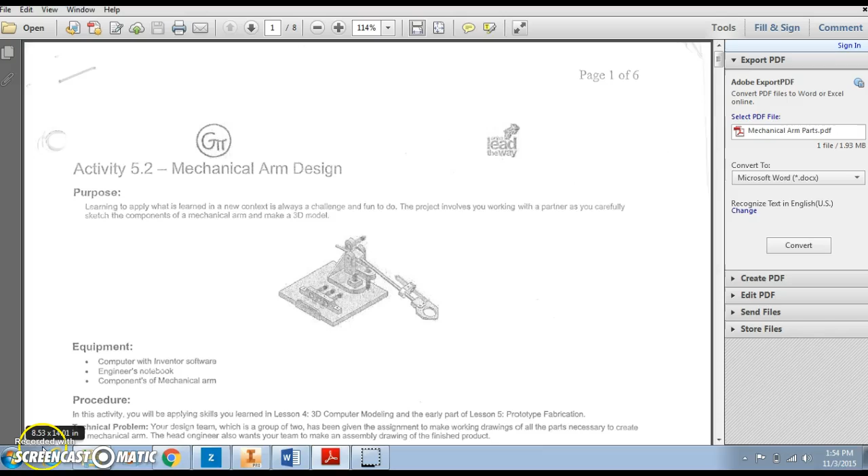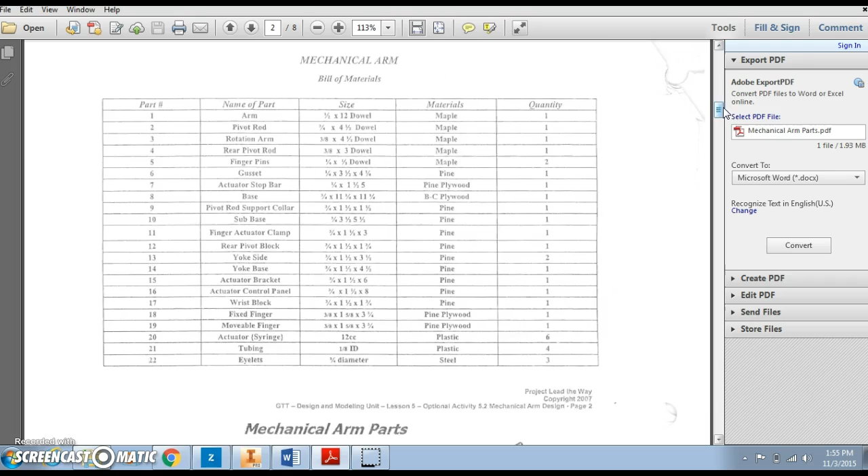Looking at my parts list, part 11 is a finger actuator clamp. Alright, scrolling down here.

There's part 11. I'm going to start with a rectangle that's 3 wide, 1.5 high, extruded 3/4. So 3 by 1.5. I'm going to create a new standard.ipt.

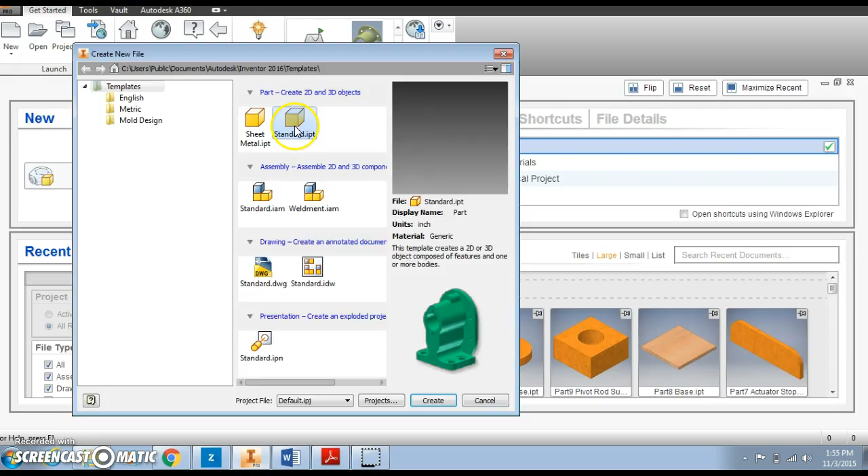And draw my rectangle, and make it 3 by 1.5. And finish the sketch.

Extrude it to 0.75. Alright, and there's my rectangle.

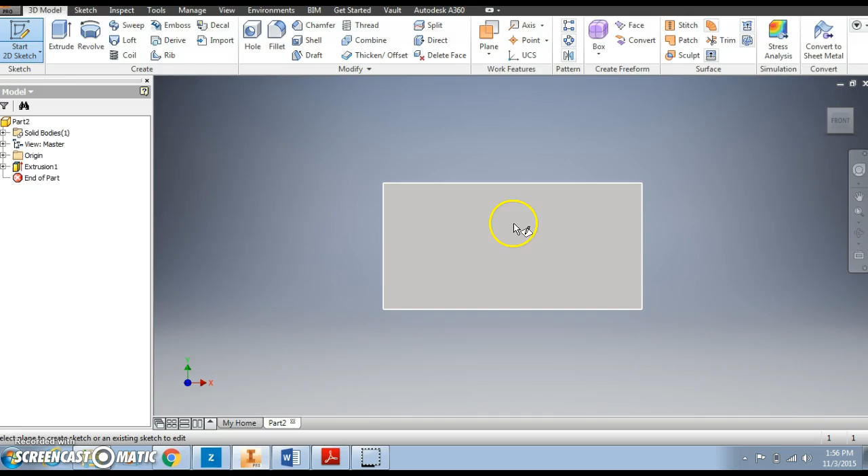Now I'm going to draw 2 holes on the front here. So I'm going to put a 2D sketch plane on here, project the geometry, and draw 2 circles.

Notice that the diameter is different. The one to the right is 0.5, the one to the left is 0.75.

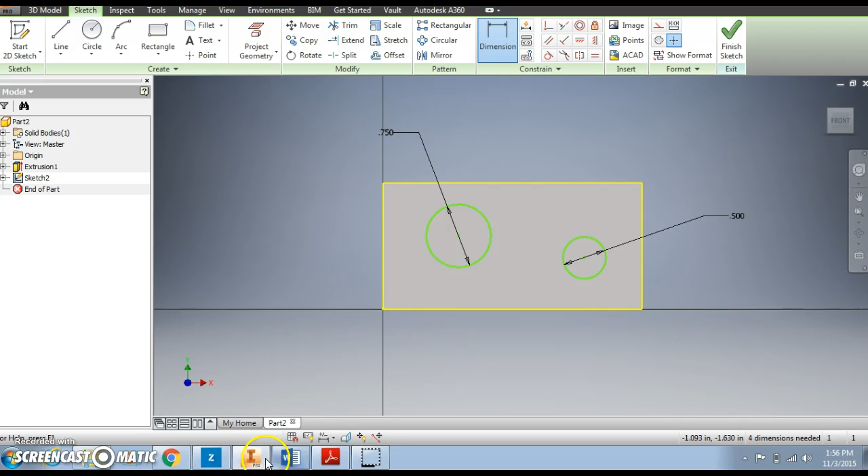Now I'm going to locate these holes. They are 0.75 on both sides from the bottom and 0.75 from the edges on both sides. So that'll be easy. From the center to the bottom...

0.75, and from the center to the edge, 0.75. I'll do the same thing over on this side.

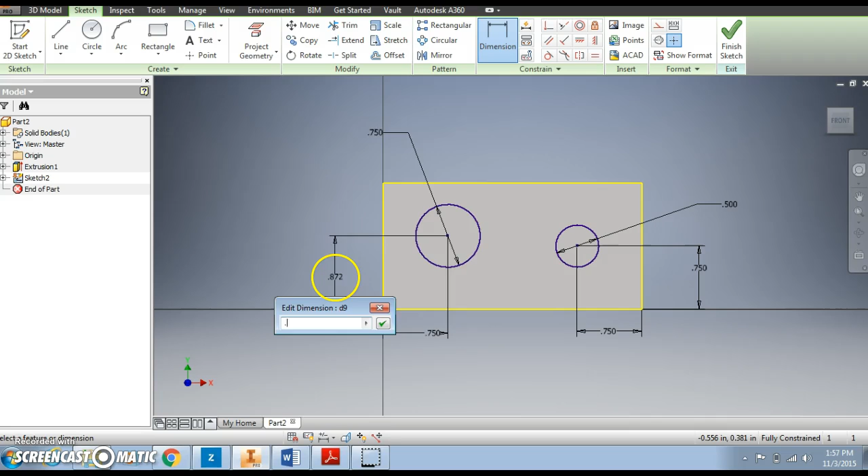Okay, so I can finish the sketch. I'm going to extrude and switch to cut, and cut both of these circles out. Alright, and there's my holes.

Now I'm going to put my hole in on the top, and it's the same procedure as always. Going back to my list, I'm going to use the point tool this time, and it's a diameter of...

0.1875, and it's centered. Alright, so we use the point tool.

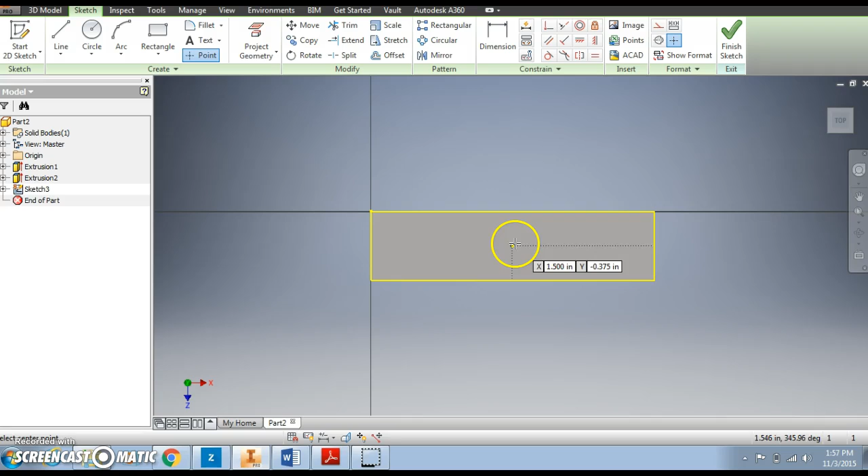Dimension it a distance of 0.375, which it already is there, and then a distance of 1.5, which it is there. I want to finish the sketch, and going back to my drawing, it's a depth of 0.75.

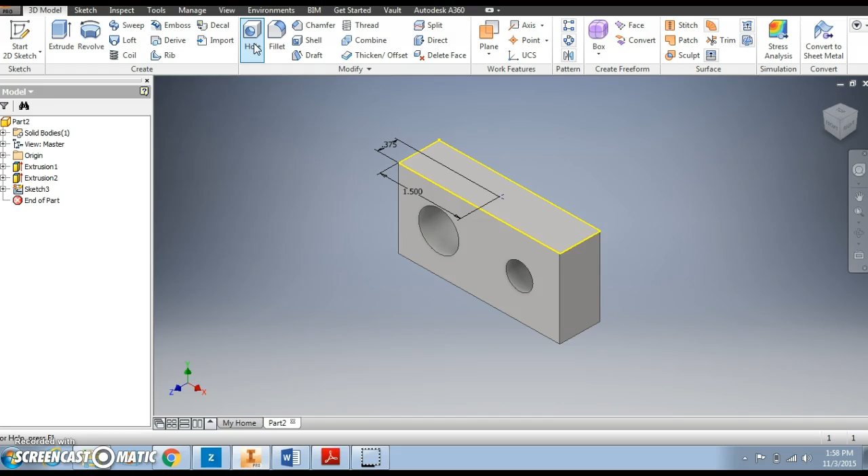So using the hole tool, I'm going to make sure it's a flat bottom like it is in the picture. And it's a depth of 0.75 and a diameter of 0.1875.

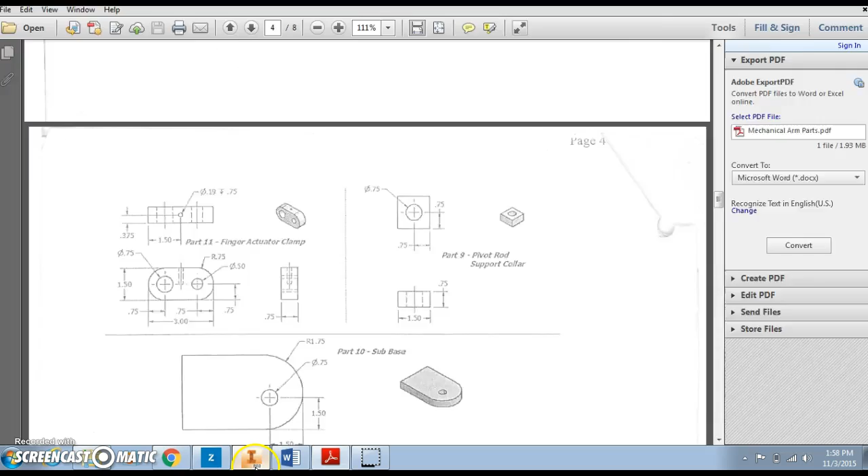And there's that. Lastly, I'm going to do my fillets, which are a radius of 0.75. Remember the fillet tool that we've used before, and select all 4 edges this time.

And hit apply. And I can now change this up here to yellow painted pine, or yellow pine, I should say.

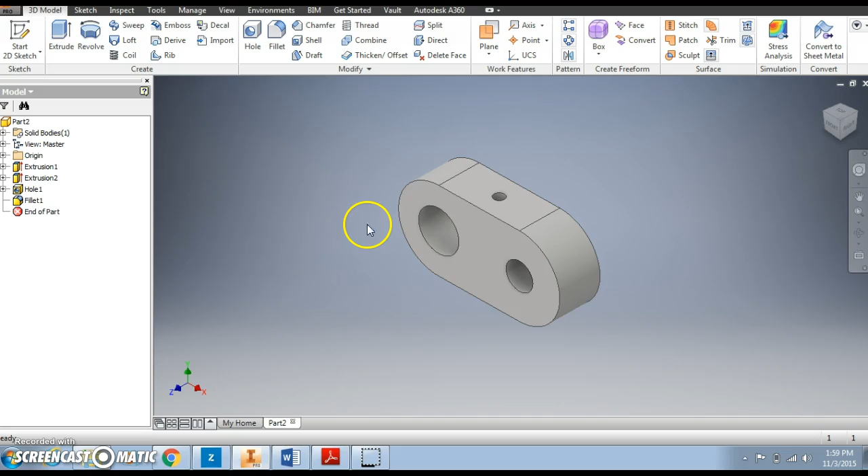And there's that. So I can do a save as part 11, and that was called Finger Actuator Clamp.

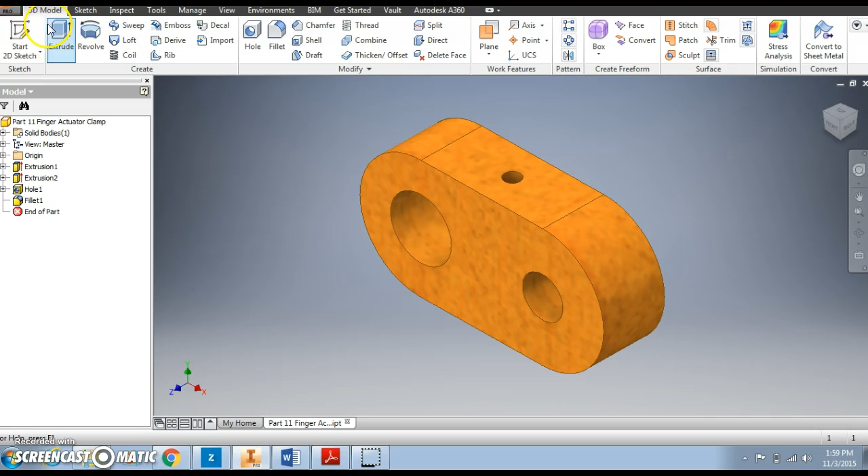Alright, let's keep moving along. Let's do a new part, move on to part 12. Go back to our plans here.

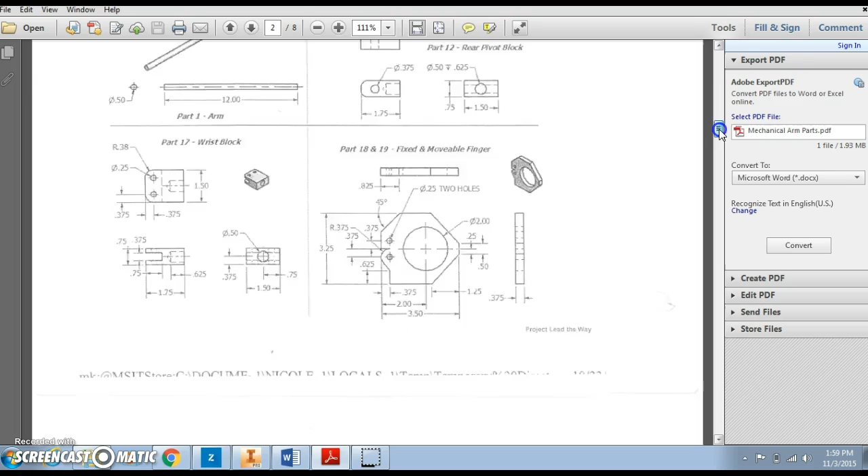Now you'll notice that obviously looking at part 12, this is not the right picture. I don't know why that's there, you can ignore that. But I am going to start by drawing a rectangle that's 1.75 wide and a height of 0.75.

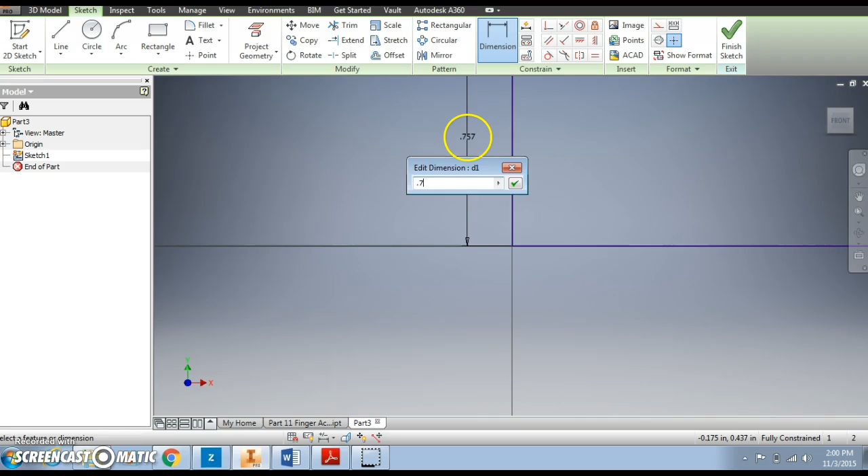Okay, and I'm going to extrude that a distance of 1.5.

Alright, so now I'm going to put the hole that's in on the front here. Alright, and there's two sets of drawings to this project.

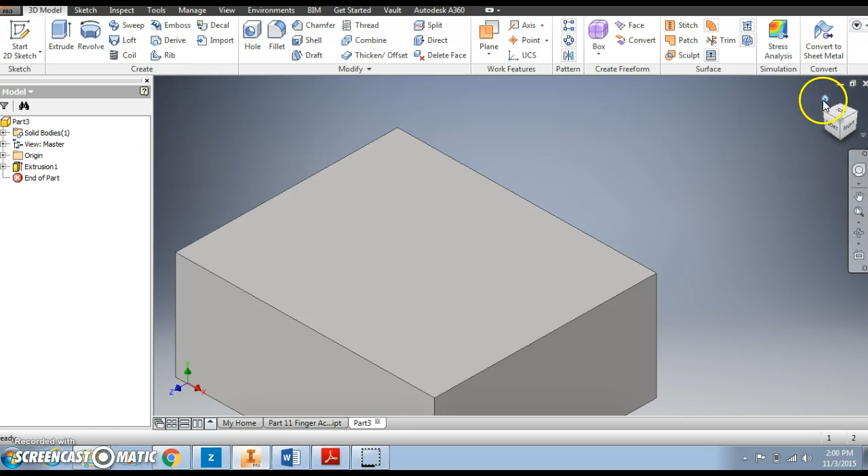Let me pull this up here first, let's get it prepped. So I'm going to put my 2D sketch plane on the front and project the geometry.

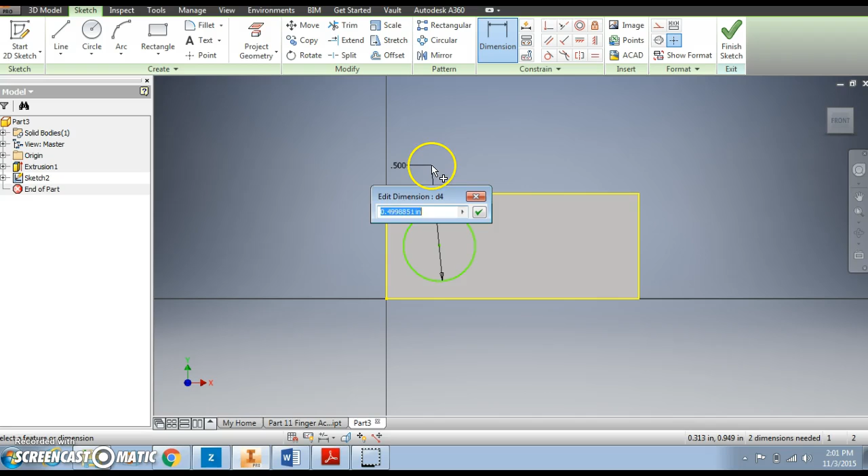And I'm going to use the circle tool here and draw a circle, and it's going to be dimensioned to a diameter of 0.5. And it is going to be centered 0.375.

And going back to the drawing, you can't tell how far in from the edge this is, so we need to actually refer back to our other drawing.

Which is this one. And it is a distance of 0.625, also known as 5/8.

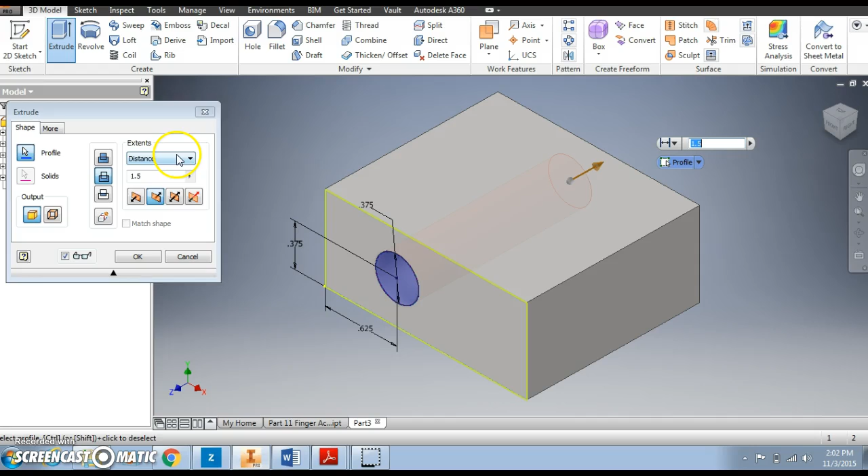Alright, so now I can finish the sketch and extrude by cutting this through all the way. And there is my hole that goes through. Alright, so now I need to put the hole in on this side.

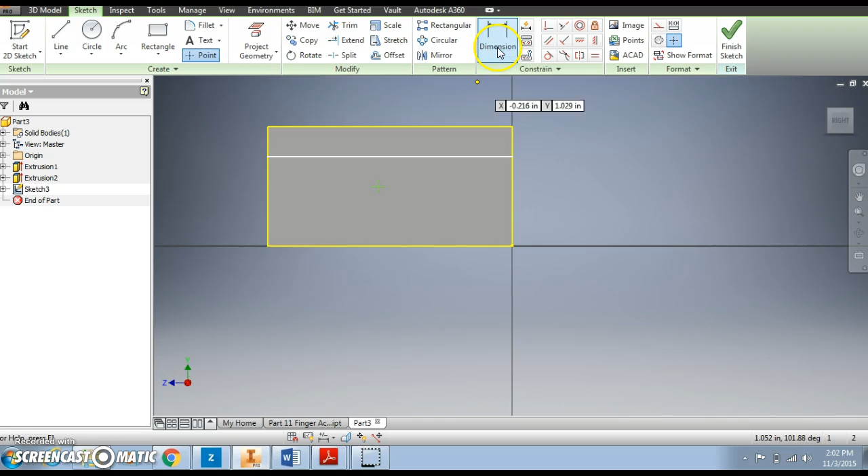I'm going to use the point tool for this, and this one is going to be centered. So this is going to be 0.75, and this is going to be 0.375, which it already is. So I'm going to finish the sketch.

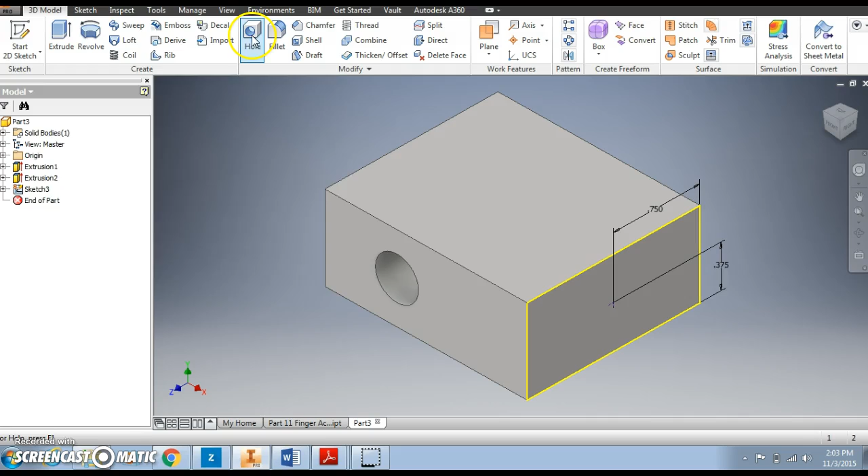This is a diameter of 0.5 that goes in a depth of 5/8. Here's my diameter right here, and then here is my depth. So hole, tipped, our diameter is 0.5, our depth is 5/8. And there it is.

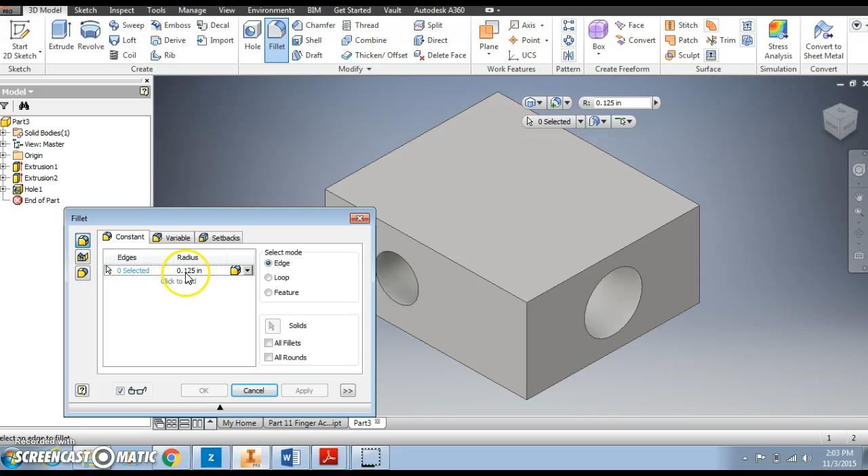Lastly, I need to create my fillet, which is a radius of 0.25. So I'm going to use that fillet tool, change this to 0.25, and grab this side and this side and hit apply.

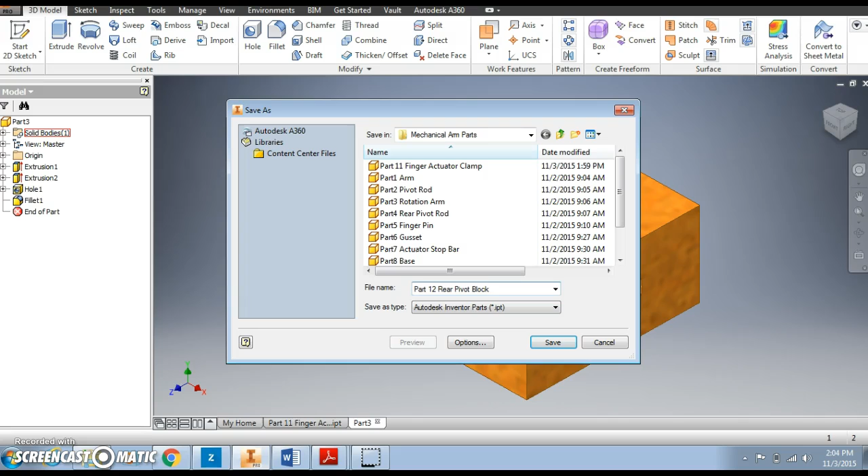And the material for this is pine again. There's that. And this is part 12, rear pivot block. So save as part 12 rear pivot block. There's that. So let's keep moving along.

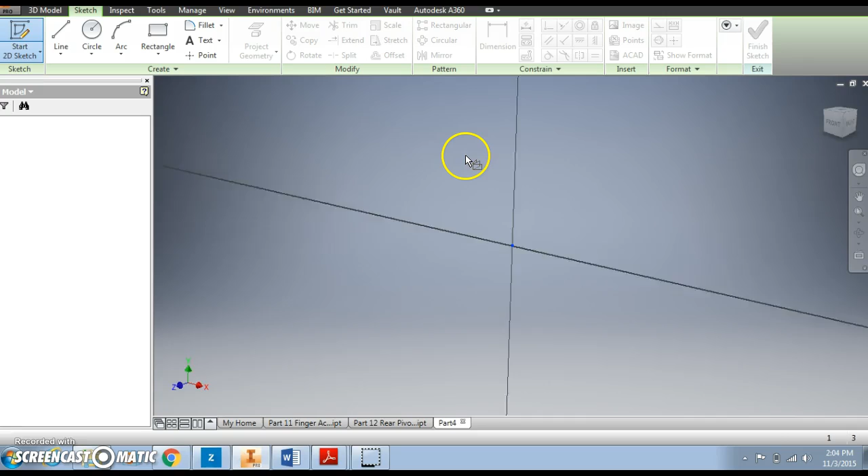Move on to part 13, which there's actually two of. So we're going to create a new standard.ipt and get our sketch plane ready while we're at it. Let's go back to our plans. Alright, so we're looking for part 13, and you'll notice it says 2 required. Like I said, there's 2 of these, one with the hole in the side, one without. We'll talk about that later. So we're going to start out with a rectangle that's 1.5 wide, 3.5 high, and extrude it 3/4.

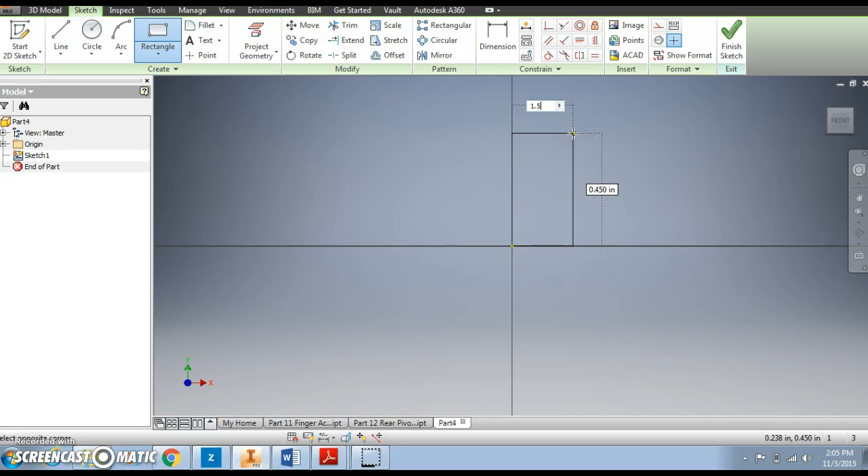Alright, there's that. And we're going to extrude it to 0.75. And that's that easy. And put a sketch plane on the front now to get our hole placed in here.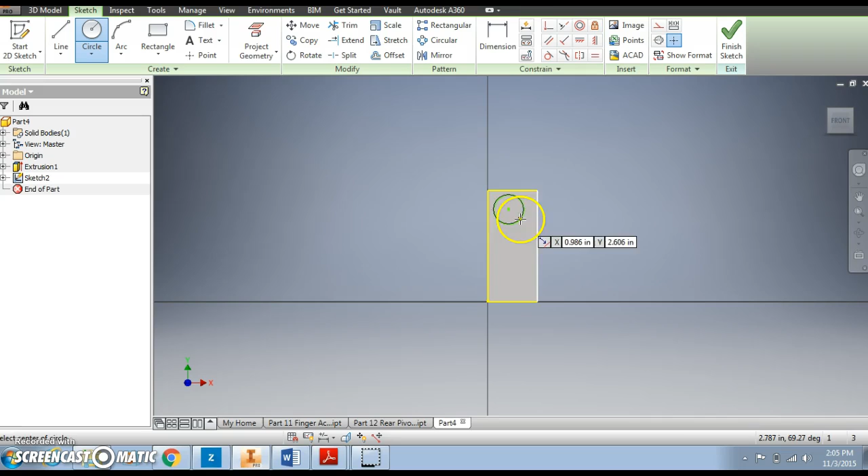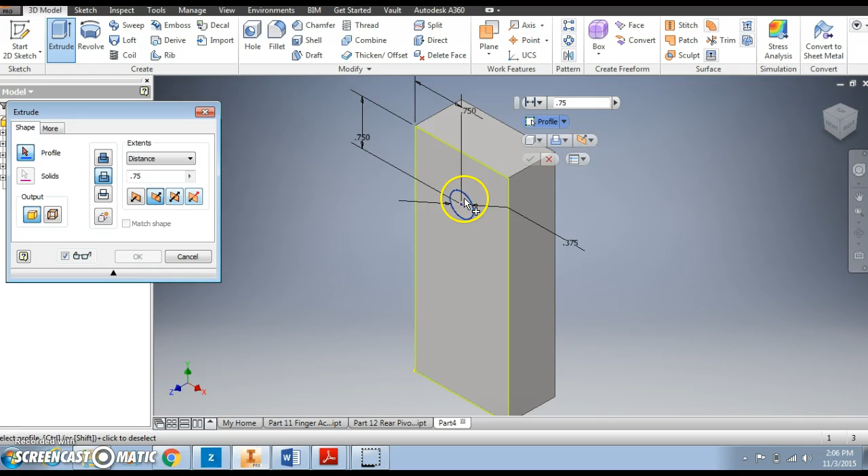Alright, I'm going back. This hole goes all the way through. It's a 3/8 diameter, and it's centered 0.75 from the top and from the sides. So I'm just going to use the circle command here. Alright, and we can dimension this to 3/8, and 0.75 from the top and 0.75 from the sides. And I can finish the sketch and cut that out.

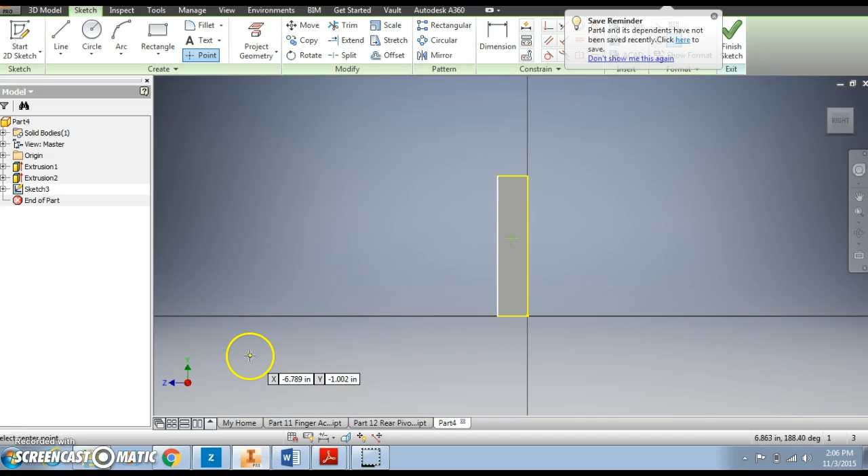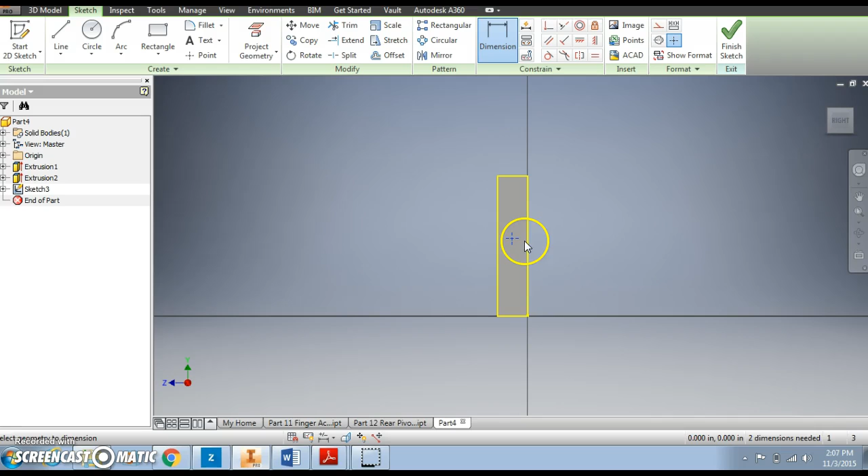And there is my hole that goes all the way through. Alright, so now there's a hole in the side. I'm going to put a sketch on the side here and project the geometry. I'm going to use the point tool this time, and I'm going to have to switch drawings again here. So I'm going to go back to my parts drawing and find part 13. Here it is. It's 1.5 inches up from the bottom. So coming back here, use my dimension tool, and I can center it, 0.375 here, 1.5 up from the bottom.

Finish the sketch, and it goes in a depth of 5/8. So hole, diameter of 0.375, which is 3/8, in a depth of 5/8. Hit OK. There's my hole in the side.

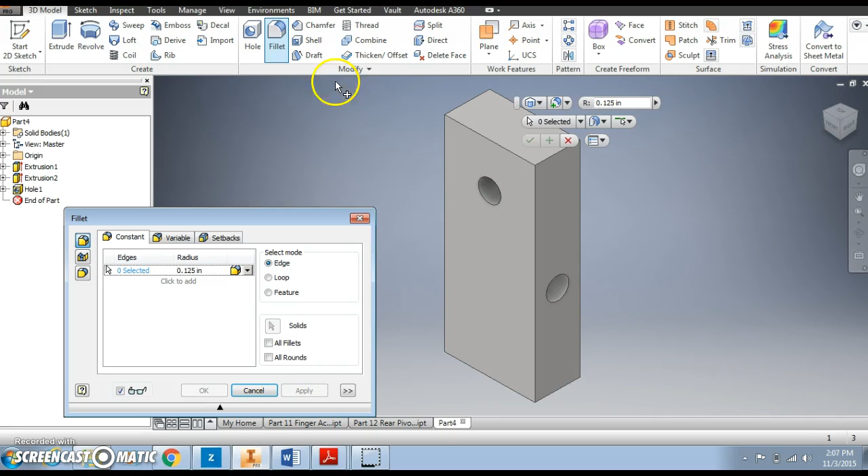And then lastly, I can do my fillet, which is 3/4. Select both sides and apply. Our material is pine.

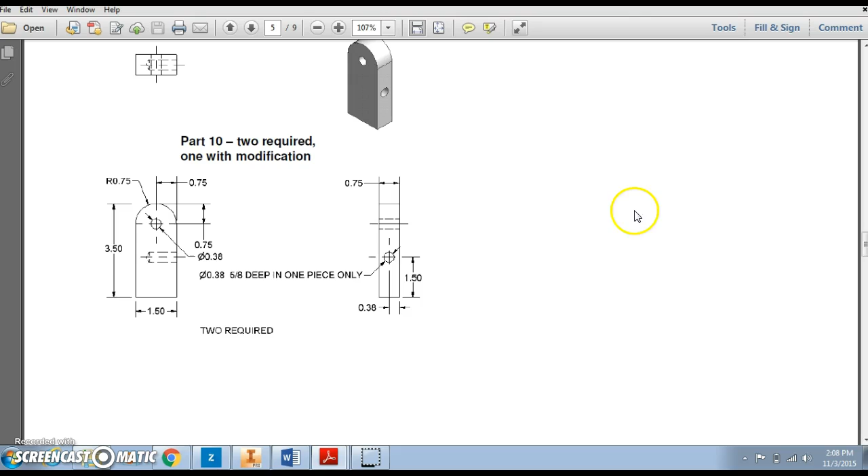And this is part 13, which is going to be our yoke side. So when I save this, I'm going to go Save As, Part 13, Yoke Side with Hole. Because I need to make one without the hole. And so to do that, I don't need to start over again. I can just right-click on this hole over here in my browser and hit Delete. And now I can do a Save As, and I can just simply go without hole. And there it is. So that's pretty easy.